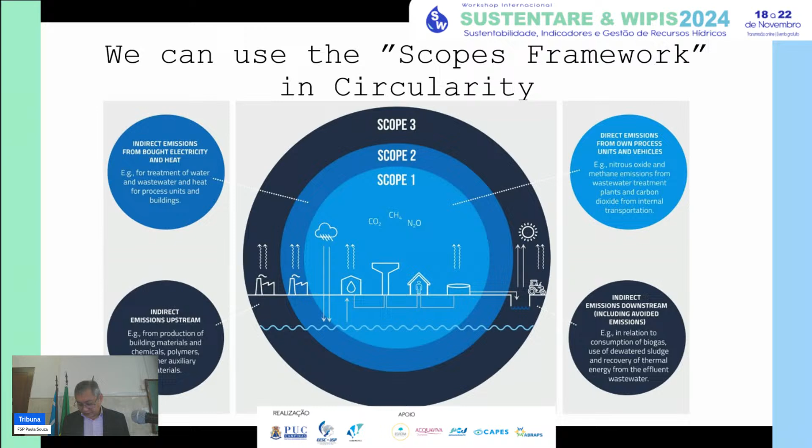So for today, I'm going to give examples of what I would call Scope 1 and Scope 2 circularity. This is a diagram I borrowed from a paper that came out a couple of years ago. It's really a climate change paper, an emissions paper, but I like the drawing, and I think it basically shows you what I'm talking about.

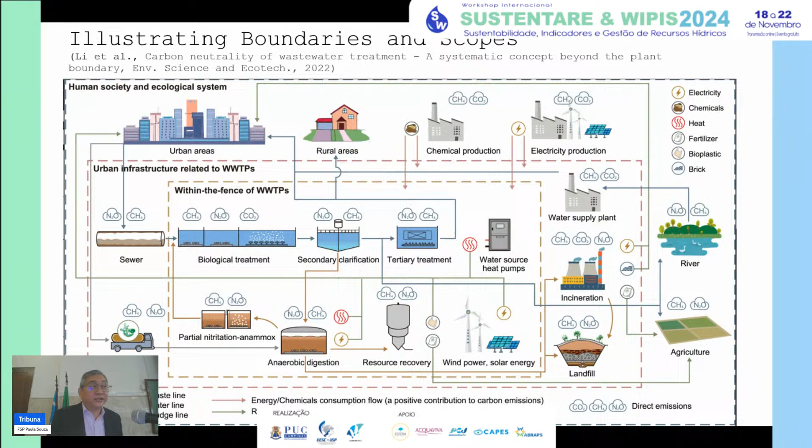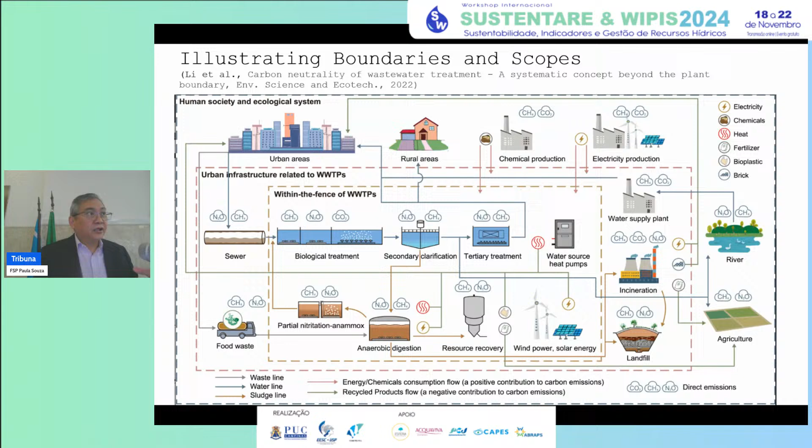Think of Scope 1 as that boundary condition within the plant, and this is in the context of wastewater treatment. So within the plant, I can have circularity already. Then Scope 2 might be the urban infrastructure that's related to the treatment plant. So for me, that's thinking about not just wastewater, but also water—how do we start doing water reuse, for example? And then obviously, Scope 3 is the larger human society and ecological system. You can think of circularity there at that larger system, but I want to focus on, again, within the plant and also the water and sanitation sector.

So what are we doing right now? This is the historical inertia, if you will, of our system in terms of centralized water infrastructure. Typically, we get our raw water supply from surface water or groundwater. Here I'm showing a reservoir that was created specifically to get raw water—it may be a lake, it may be a man-made reservoir. And then we get that water, we treat it in a drinking water treatment plant, and then we pipe that treated, very clean water, millions of gallons per day, or millions of liters per day—sorry, I've got to think metric.

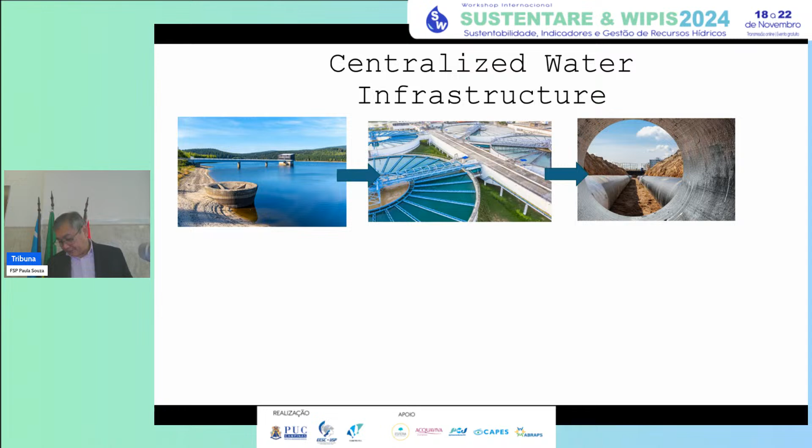Maybe thousands of kilometers. A typical system might have, for example, the city of Atlanta has 2,000 miles—so that's roughly 3,500 kilometers of pipes for drinking water, and about the same, 3,500 to 3,600 kilometers of pipes for wastewater. Other cities like Charlotte, which is the biggest city in North Carolina, it's double that—it's a more spread-out city, so it's actually more like 7,000 kilometers of pipe network. So we pump millions of liters per day through these thousands of kilometers of pipe. Lots of energy involved with that, right?

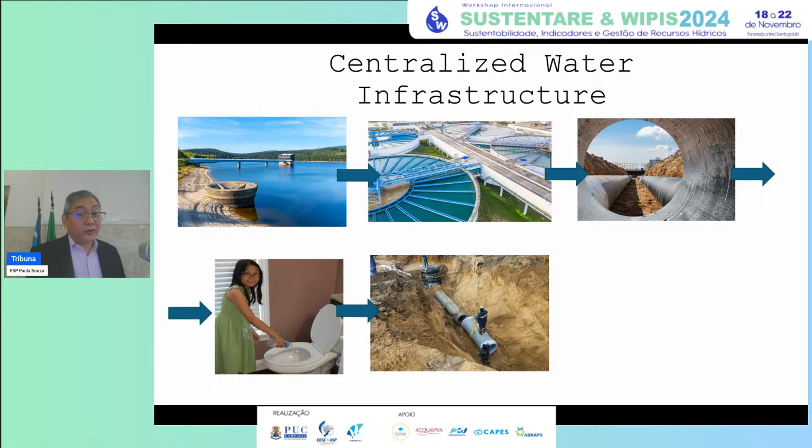And then we use that clean drinking water to flush our toilets—that's what we're doing right now. Then we collect all that wastewater, same deal, sewage lines that are thousands of kilometers of pipes. And then we treat that in a large wastewater treatment plant so that we can discharge that water into another river, another lake. And then the cycle goes on.

So there's some inherent circularity here in that I might be a utility or a town or a city—I put my treated wastewater into a river or lake, and that same river or lake might be the drinking water source for another town or municipality downstream. That's happening in my area, where there's a lake in North Carolina where the South Durham wastewater treatment plant puts its water into Jordan Lake, and Jordan Lake is the source of drinking water for two other major towns in that region. So there is already some indirect, if you will, reuse of water, and that's happening all over the world. It's just part of the water cycle now.

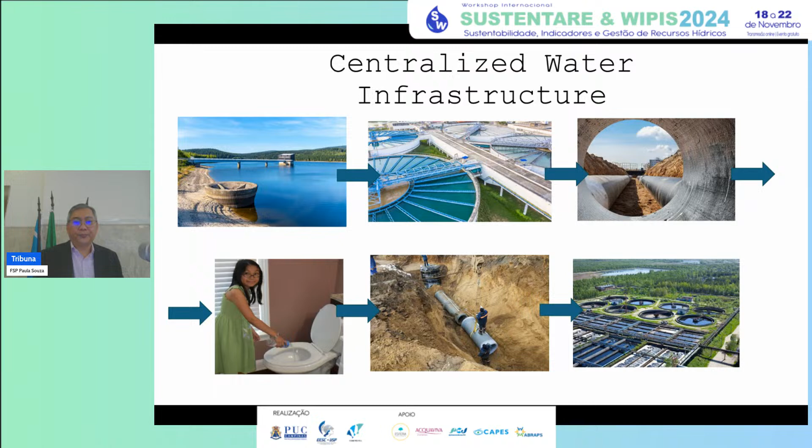So we need this to be more circular, because right now it's very linear, even though we do have what I'd call non-intended reuse of water. This is a diagram from a report from Arcadis that talks about how we can save energy, lower greenhouse gas emissions, and avoid hydrologic cycle disruptions. This is because we're usually trying to get water from one basin and return it to that same basin, but sometimes we return the water to a different basin, so there's inter-basin transfer, and then also capital and operation expenditures.

So this diagram is showing us how we can reuse wastewater, recycle it, and then use it, in this case, for water in the home.

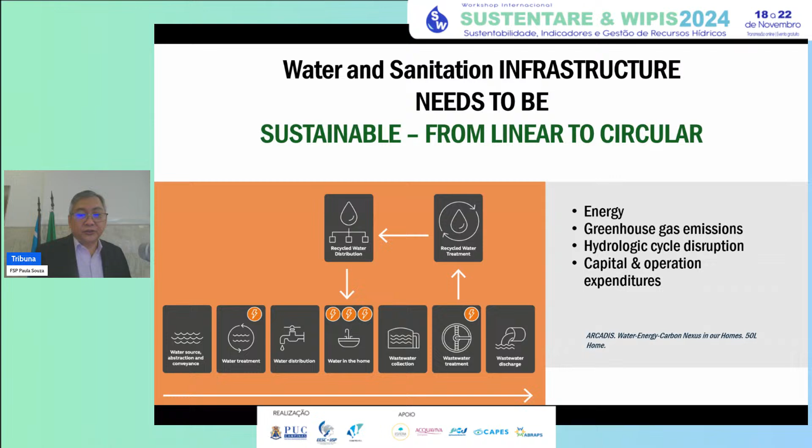What Professor Tadeo was talking about was, for example, in the city of Raleigh and the town of Cary, close to North Carolina State University, they actually treat the water to a quality where it can be used for irrigation, mostly irrigation—not yet for toilet flushing. So maybe 5% to 10% of the wastewater can be used for that, with additional chlorination, for example.

Then that water is put into a reservoir, a natural system, and that becomes the source of raw water for a city. It goes through the same traditional drinking water treatment plant system. So this is what traditionally is called indirect potable reuse.

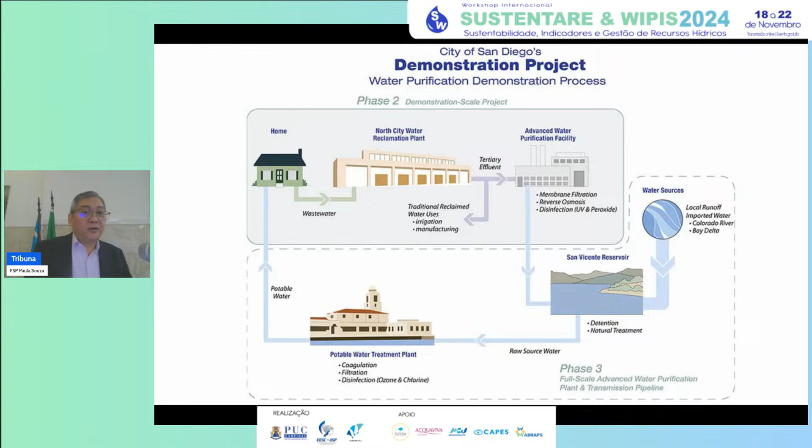Countries like Singapore have been doing this for a long time now—the NEWater Project is very similar. 50% of their water in Singapore is pretty much recycled wastewater. And now this is happening in places like California.

So just to show you what's happening now, California is taking the next step to have direct potable reuse. So what is direct potable reuse? I don't put the wastewater effluent into a reservoir—I put it straight into my drinking water treatment plant. So it really is directly doing that. This came out just a few months ago.

It's basically showing that following years of research and public engagement, which is very, very important—it's not so much the technical part, it's actually the education and engagement of the public. Because, you know, before we called it toilet to tap, and that's not a really good term, because if you call it that way, people think, oh, I'm drinking my toilet water. But it's not really true—you're drinking very highly treated water.

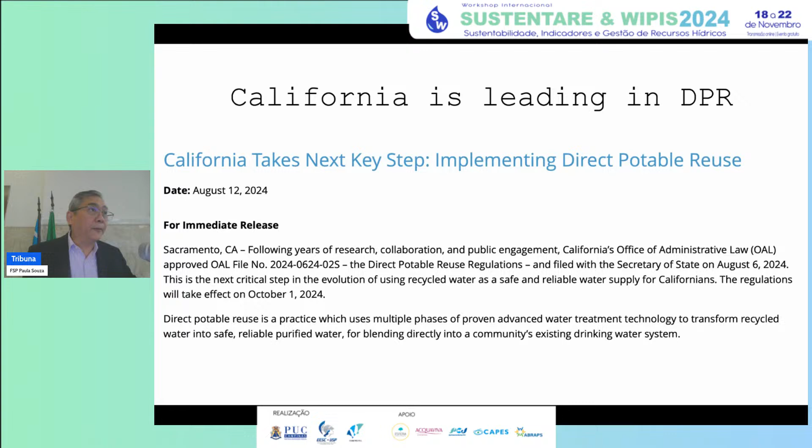And so basically, there are now regulations that have been approved in California. Starting just last month, October 1, 2024, these regulations are now in place in California. The reason is that California has an issue with a growing population but a lack of sources of water in many urban districts—for example, in Southern California, where San Diego is. Maybe not so much in Northern California, but when you have a big drought, Southern California is a big issue. This is true for other states too—Nevada, for example, Western states, and maybe even Southern states like Texas, parts of Texas.

Just to summarize, this is a diagram from the Water Reuse Foundation. What I'm talking about is wastewater treatment, and it says including source control—that's very important to make sure you don't have discharges from industry, for example, that would make your wastewater treatment process less effective.

And then you have advanced purification—these are some of the technologies involved. Maybe ozone for oxidation and disinfection, activated carbon for removal of organics. A big issue in the US right now is PFAS, perfluorinated substances—probably have heard about this. It's a byproduct of Teflon and water repellent chemicals that we put in our clothes, shoes, furniture, and firefighting foams. That has contaminated a lot of water sources, and it's very hard to degrade and remove from the environment.

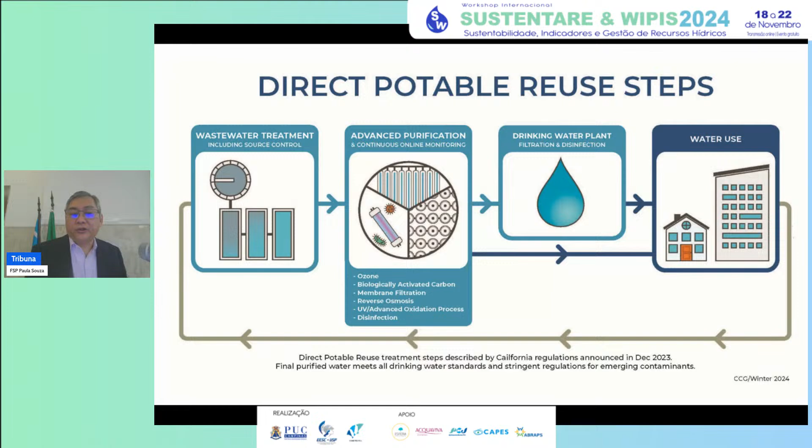Also, obviously, things like personal products, pharmaceutical products, hormones, those types of things—activated carbon is quite good at removing organic contaminants. And then I mentioned membrane filtration, RO, and then UV advanced oxidation processes and disinfection. Then that water goes straight to the drinking water plant, and then also for water use, and you close the cycle. So this is direct potable reuse.

It's a little bit small, but this is a map of California and all the potable reuse projects. You can find this map from WateReuse California. It's funny because the units are acre feet per year, which is very American, right? Surface area, 1 acre, 1 foot, and that's equivalent to about 3,377 liters per day.

If you think about all of the potable reuse projects, the colors are basically looking at groundwater. In other words, you treat the wastewater, put it back to the ground, and then that groundwater is the source. The aquifer is the source for drinking water, or surface water, and also future plants.

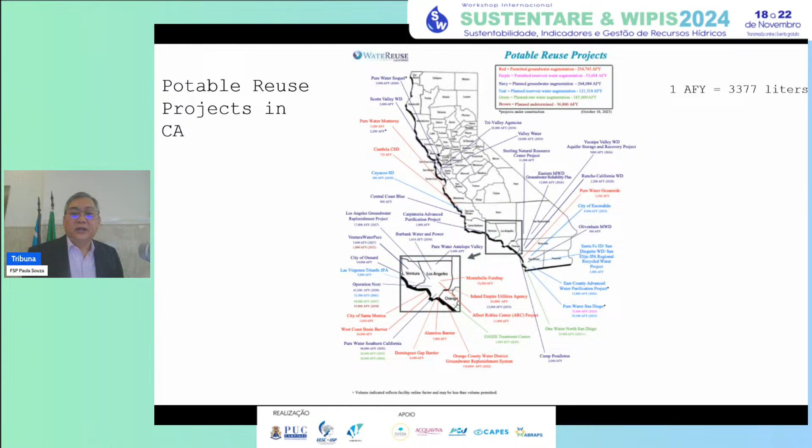Here is a more magnified image for just Los Angeles, which is Southern California. So we already have existing 93,000 acre feet per year, but the planned one is equivalent to about 1,377 MLD, million liters per day.

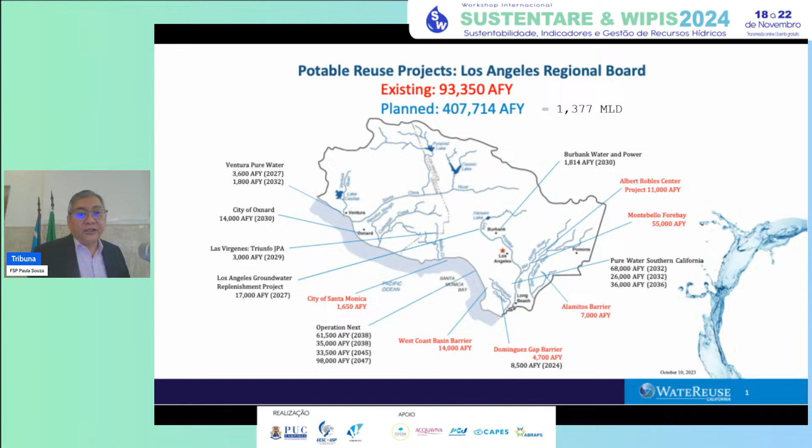So it's happening. And again, these are all the different plans. Existing is the red, and then the plans are there. Different cities are planning pretty much potable reuse projects in California.

Let me give you an example of within the fence, or inside the fence, circularity. Here is a process for biosolids treatment called thermal hydrolysis.

This is basically pressure cooking biosolids. So the biosolids you produce, for example, from your biological activated sludge system, you usually put that into an anaerobic digester. The anaerobic digester gives you biogas, methane, that you can reuse for energy. But this process happens before the digester. You actually put the biosolids through high pressure and high temperature, maybe 90 psi or 165 degrees centigrade, a few atmosphere, and that basically opens up the cells like pressure cooking.

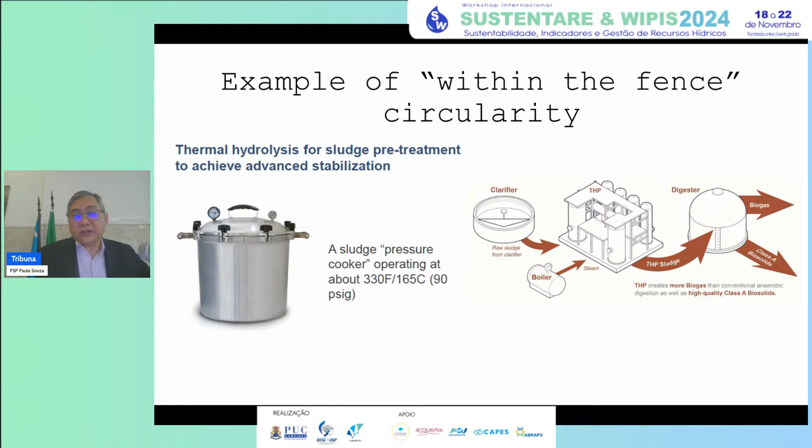What that does is it allows the following anaerobic digestion to be more efficient, more effective, and creates more methane. So these are the benefits: you can lower your anaerobic digester volume, which means lower capital cost. You can increase your biogas production, even if it's just a 20% increase, that's greater revenue. Your volatile solids reduction means you don't have hauling costs, so you lower your hauling costs. Your cake solids will be higher in solids content, lower moisture, so again you lower transportation costs, and you get a Class A product because your biosolids is sterilized, which is good for the environment.

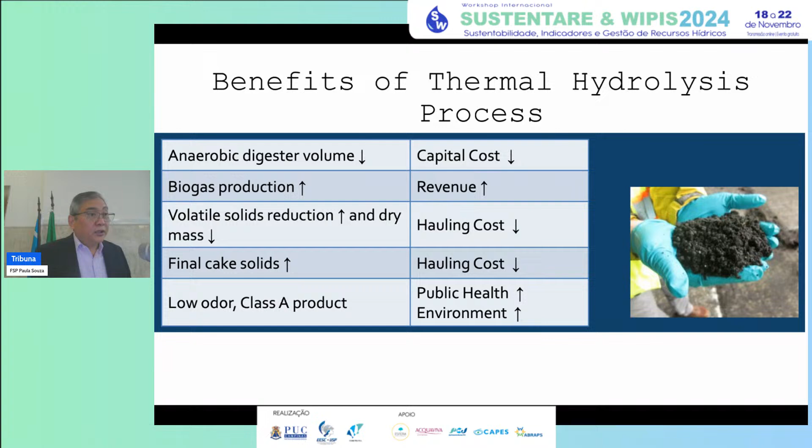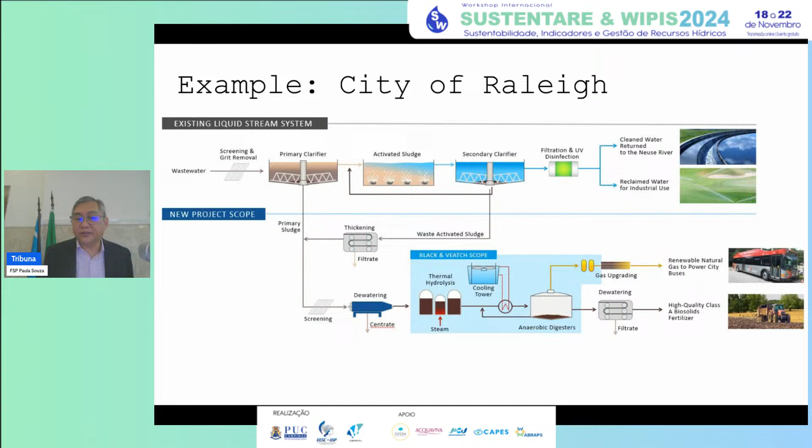Another example, if I think about widening this, is how do I do something like co-digestion of food waste? In the US, you have billions of pounds of food waste. The statistic is globally 38% of food from farm to fork goes uneaten. It becomes waste, whether waste at the farm, waste in the transport, or in the restaurants, or in the houses. Almost 40%—that's a lot of food waste.

There's also a lot of grease waste—this is the fats, oils, and the grease. In the US, we have grease interceptors, which basically prevent that; these are like settling tanks. After a restaurant, you have these settling tanks. They're on the ground, under the ground, and basically they allow the capture of the fats, the oils, and the grease to float on top, and that's recovered.

The reason for that is you don't want that to go to the sewer line, because then you get all these FOG deposits, and they block the sewer lines, and then you get all kinds of issues, right? I don't know if you've heard of the fatbergs in London and everywhere around the world. They're finding tons and tons of fats and oils and grease deposits in sewer lines.

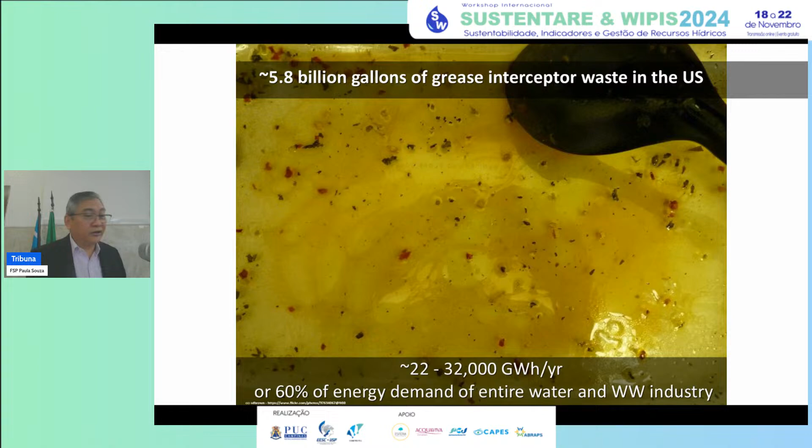Fats and oils have very high energy and calorie content, so you can collect some of that. Here I'm showing a sampling of a grease interceptor. It looks like this, and you can look at how much fats, oil, and grease are in these interceptors.

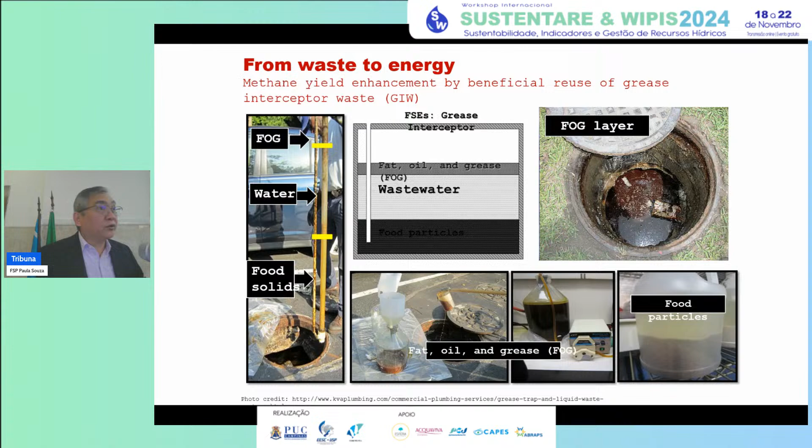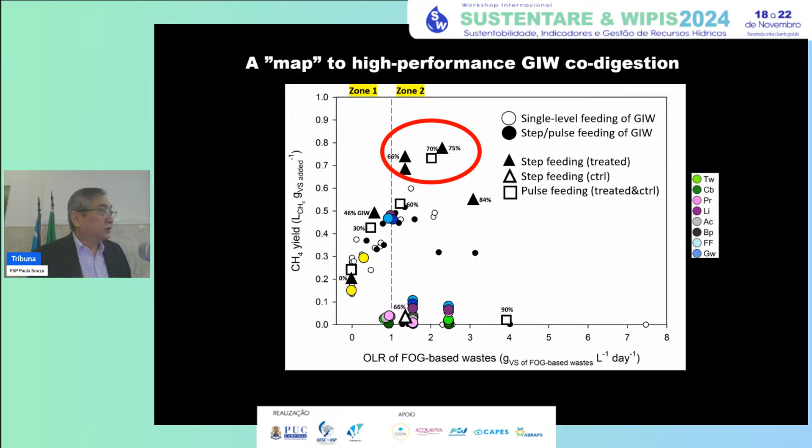You can reach those values if you train your digester. If you just feed this directly, your digester will die—it's too much load, too fast. But if you train it step by step and feed the right substrates, you can get to those high values. This is just summarizing a lot of research data.

We have a big issue still in the US in that it needs to be sustainable. Because of greenhouse gas emissions, energy, and capital expenditures, our infrastructure needs to be sustainable. Right now in the US, our infrastructure for water and sanitation is so behind. We need still billions of dollars—about $20+ billion over the next 10, 20 years—just to update the pipes. It's very expensive, typically $1 million to a few million dollars per mile of pipe that you replace, because you have to dig it out and replace it.

So one possible vision is reducing water use, and I'm putting here a big vision of 75% reduction in water use and 50% reduction in energy. I'll talk about that.

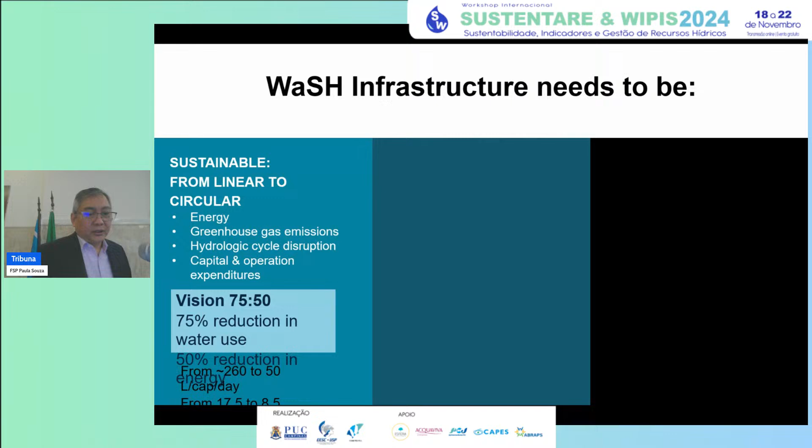The next issue is climate change. If you have extreme flooding happening, like what happened in Western North Carolina, you can have whole plants—drinking water and wastewater—destroyed underwater in just one day. The city of Asheville in Western North Carolina didn't have potable water for 50+ days, almost 60 days. They just got the first drinking water 2 days ago. Can you imagine 100,000 people, most of the city, not having drinking water? And that's because of climate change.

So that's an issue—resilience. And then finally, equity. In the US, you'd think everybody has water and sanitation, but actually no—we have 2.2 million Americans, and that's a low estimate, who don't have access to clean drinking water and safe sanitation. Maybe they have a toilet, but in some parts of the country, when flushed, the wastewater just goes to the backyard like a cesspool. This is a big issue, a question of equity. Most of these situations happen in low income communities and communities of color, so there's a racial and income issue here that we have to be aware of.

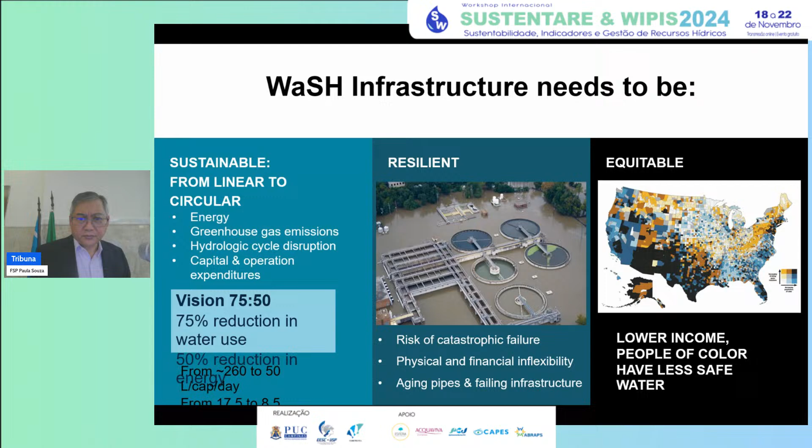Most centralized systems in the US reach people in urban areas—they're close enough to be connected. But in rural areas, people are not connected to the centralized sewer line because it's too far, too expensive. In some states, septic tanks are 50% of the wastewater treatment, on-site treatment systems. So what's needed, in my mind, is a more integrated water system.

These are some quotes from thinkers and papers saying we need to rethink this integration, make sure we are innovating, and we need radical innovation. So here is where I'm putting out this goal: at least in the US, 75% reduction in water use—that's a huge goal—and 50% reduction in energy. This is what we call a big, audacious goal. Where are these numbers coming from?

Let's think about reduction in water use. The average water use in the home breaks down like this: about 1/4 is for flushing toilets—remember, we're flushing it with clean drinking water. About another 1/5 is for washing clothes. And then you have the other half, maybe showers and sinks.

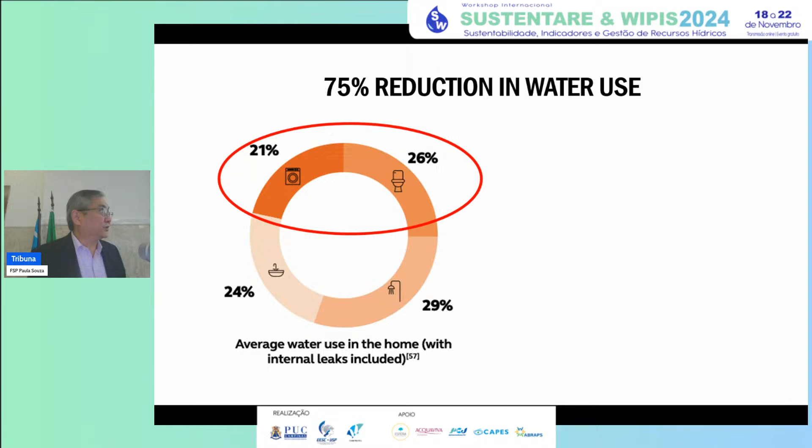This number right away is 47% right off the bat if you don't use clean drinking water for this. There is no point in using clean drinking water for flushing your toilet.

The other thing is that the average water system loss because of leaks in the sewers and leaks in the distribution pipes is about 16%. Some are higher, some are lower. The newer systems are lower, 5% or less, very good. But some systems may be as high as 20%, just water losses because of thousands of kilometers of pipes.

This paper put out by Arcadis was talking about how we can get it down from 260 liters per capita per day to 50 liters per capita per day in the US. We can do it if we take out that 50% right away, with more efficient appliances and smart appliances and taking care of the leaks.

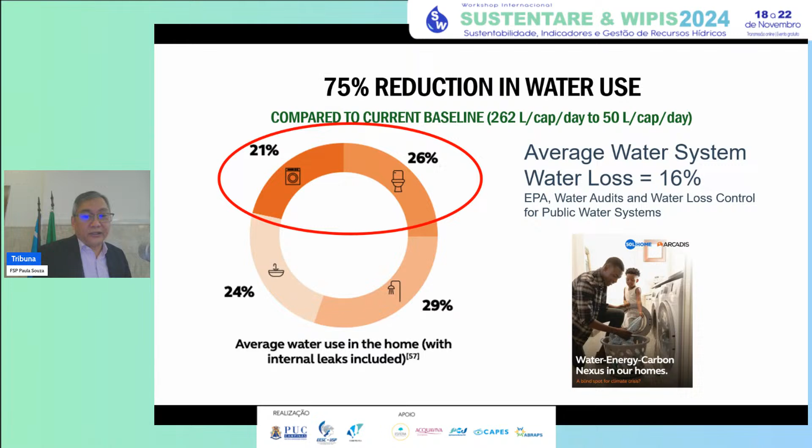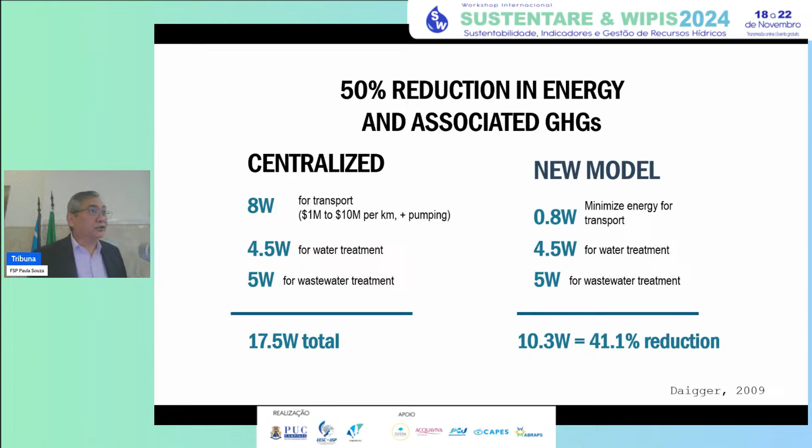What about the 50% reduction in energy? Here I just used the number that's been published. For a centralized system, this is per person: 8 watts for transport, 4.5 watts for water treatment, 5 watts for wastewater treatment. If I just reduce that transport from 8 to 0.8, right away I get a 41% reduction in energy, if I don't have to pump water long distances in large volumes every day. So that's just kind of a back of the envelope, rough calculation. But you can see how we can get to 75-50.

So what I'm talking about is transitioning to what I call an integrated socio-technical system. Right now we have centralized or grid-dominated systems in the US, and we've talked about how sometimes that's not sustainable, not resilient, and not equitable. For the most part it works well, and it works for a lot of people, but it also leaves some people behind. So what I'm proposing is we transition to a more sustainable, resilient, equitable, and circular system.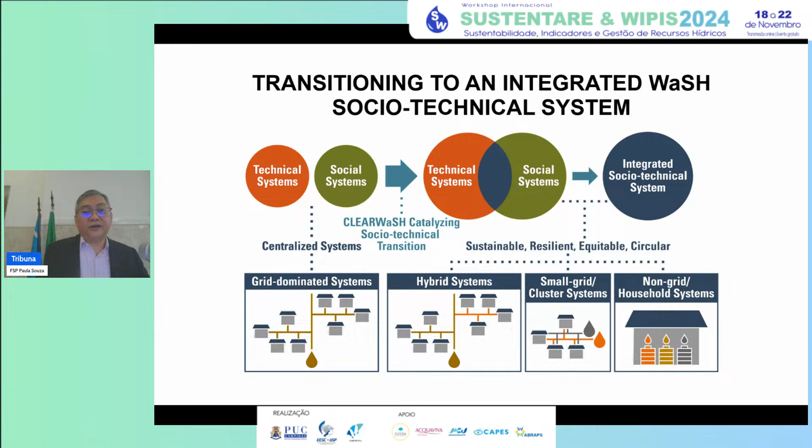The way to do that is to integrate the technical and the social system, and also to have other types of approaches like hybrid systems. Maybe some places are centralized in their water but decentralized in their wastewater. Maybe some cities are centralized and some are decentralized or distributed. Maybe we have small grid or cluster systems—neighborhoods, hundreds of houses instead of the whole city—and these dozens or hundreds of houses share their own wastewater system. Or maybe, in the most decentralized case, the house itself is where you find the technologies for reusing the water.

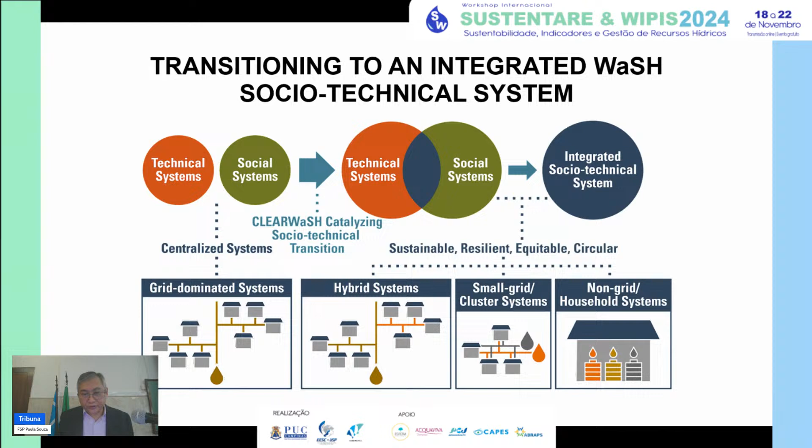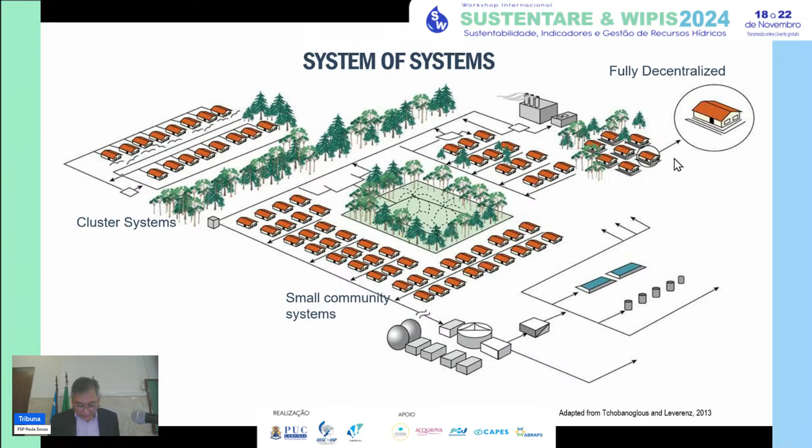So this is more about the future. A system of systems where you might have a small community system, you might have cluster systems, and then you might have a fully decentralized system just within the house. Let me show you what that looks like.

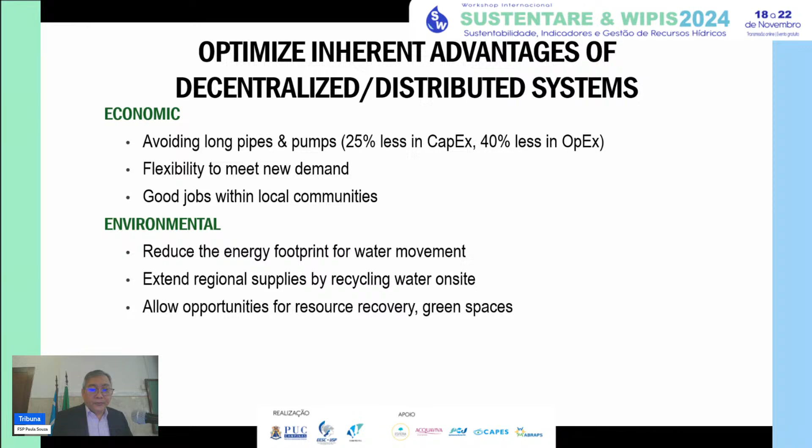First let me go through the advantages of decentralized systems or hybrid systems. Avoiding the long pipes and pumps, flexibility, because now I can design these systems according to need and use, and I can also put the jobs in the local communities. From the environmental side, I can reduce the energy footprint, extend regional supplies by recycling water on site so there's no inter-basin transfer, and allow opportunities for resource recovery and green spaces if I do this right.

From a social side, there's resiliency to community events. For example, in Western North Carolina, when the drinking water system was down, the whole city was without water. If you have a lot of smaller systems, you can bring those online one by one, and get some people water very early on. And when you have water in one spot, you can support other surrounding communities. For the first 10 days, they didn't have any water in the pipes, and people couldn't flush their toilets, so they had people doing water brigades, going house by house giving people water just so they could flush their toilets.

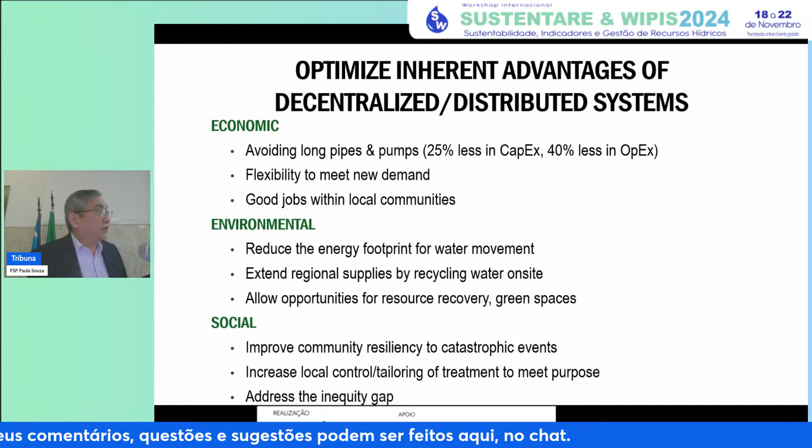So communities came together, but what if we don't rely on the centralized system and instead had smaller systems? It can be more flexible that way—increasing local control and tailoring the treatment to meet purpose. In other words, we're not treating water to the level needed for drinking water if we're just using it for irrigation or flushing toilets. And finally, to address the inequity gap, because for a lot of these places—rural areas, low-income communities—this is the way for them to get access to water and sanitation.

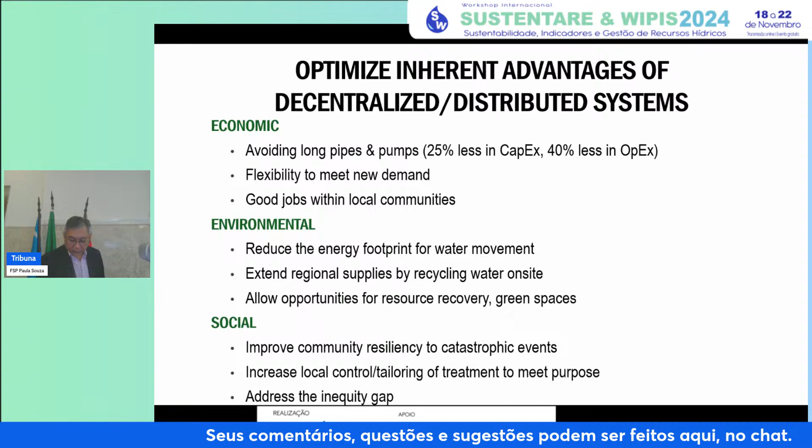So how is this going to work? There are lots of questions about this. This is just a kind of radical innovation, an idea. One of the questions is always, who's going to operate the small plants, who's going to operate the household systems? We are used to just flushing it and not caring what happens—flush it to forget it. The household is really not involved in water or wastewater. They take it for granted unless there's a problem, and then we have to call the plumber and do all kinds of things.

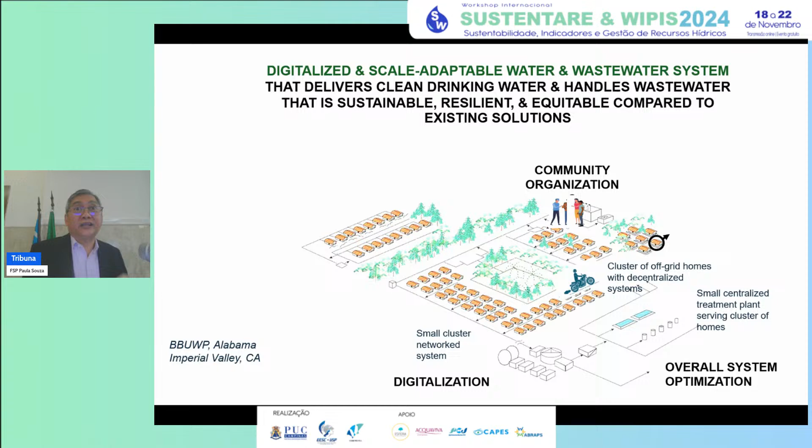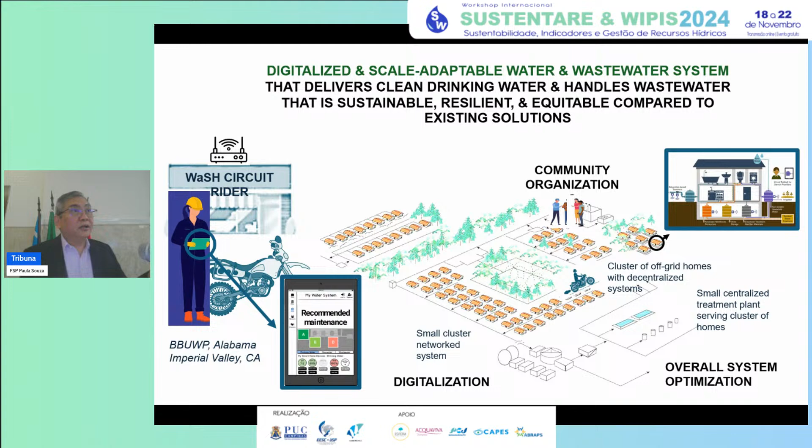To me, the solution is, in some ways, two things. One is technology—if we have sensors, we can digitalize the data. What's going to happen is that in terms of operation, only a few people are really needed. Maybe the utility can decentralize it so operators can just watch the screen and operate maybe 20 treatment systems around the city, relying on sensors and data coming in through Wi-Fi. They can see which plant needs work or maintenance and monitor it from afar. So you don't need an operator for each small system—one operator can operate a lot of different systems. This is called the circuit rider concept, where one operator goes around fixing what's wrong and maintaining the system.

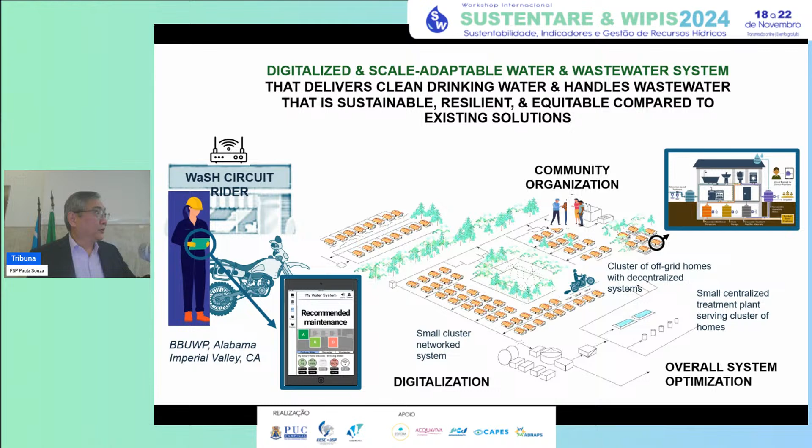The second is involving the community. This is why it's an integrated socio-technical system. People are going to be more aware of what's going on in their water, and they'll be conscious about what they put in their wastewater, because they know that gray water is going to be recycled. So the social part of it is very important.

Let me give you an idea of circularity within a single household—I'm calling this the house of the future of water. First we have to realize there are many different kinds of wastewater we produce. We have yellow water, which is urine; gray water, from sinks, showers and bathtubs; and brown water, from the toilet. Those need different kinds of treatment. With urine, for example, you can treat it so you can actually recycle the nutrients, maybe nitrogen and phosphorus.

And then with gray water, you can treat it so it can actually be used back in your house for flushing the toilet, or washing your clothes. This is where we have to be comfortable with the technology, where the gray water is treated to the extent that we will use it for washing clothes. And this is going to happen with sensors and novel technologies.

Imagine if my sensors are connected so that on my cell phone I can check my water quality and my water quantity. Right now I can do that if I have a camera at home to see who's going into my house, or a controlled thermostat—right now I can check the temperature at my house and change it, even adjust my thermostat in the US from Brazil. Why can I not check my water quality right now? This requires sensors, and this requires me being able to see that quality. So it's not yet here, but it's coming.

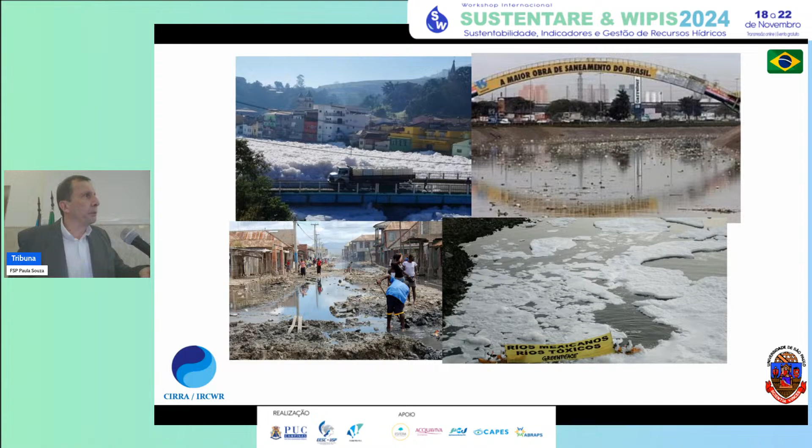So what are the options to cope with these problems? Professor Franz already told you a lot of the solutions, but one of the most important is using water more efficiently. We have a lot of homes or industries that use processes and fixtures that don't use water in an economical way. We have quite old fixtures in apartments or houses, and nowadays we can, of course, change this kind of equipment.

To reduce water consumption, I did a study here in São Paulo during the crisis of 2014-2016. The investment they made to put in place another water production system, to bring water from one place to São Paulo, if invested instead in replacing these fixtures, we would be able to reduce more water than was brought to São Paulo, maybe twice as much. So the investment was around 3 billion reals at the time.

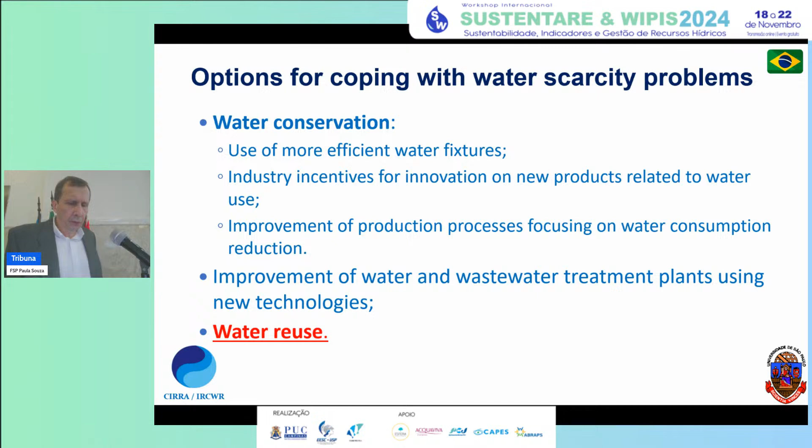So water reuse can be combined, of course, with the first option, which is reducing consumption. Water reuse can bring better solutions for many places.

So what you need to consider about water reuse, because water reuse schemes are quite complicated. When you talk about water reuse, people say, okay, let's make water reuse for non-potable use, which makes more sense, using water with a quality that is not enough for drinking but could be used for toilet flushing and things like that.

So what's the idea? How feasible would be the results of investing in non-potable water reuse schemes in established cities and settlements? What sector do we need to think about to invest in? We need to answer a lot of questions about the implementation of water reuse, such as who will use the water and what are the potential demands we need to address.

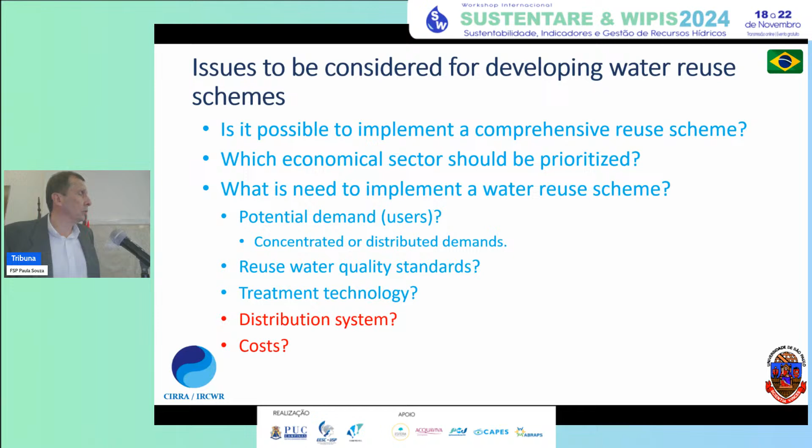If you go to a modern or new technology and double the treatment cost, instead of 20% we'll go to 25 or 30% of total investment. People think they won't adopt new technology because it's expensive, but how expensive is it compared to doing nothing - using the traditional business as usual approach? The cost is a quite important issue to take into account when implementing reuse systems.

Here in Brazil, we started to talk about projects related to non-potable reuse, but pretty much centralized water reuse schemes. The first one was implemented by Sabesp, a water supply company here in the São Paulo state.

In 1998, they implemented the first direct line for supplying reused water to a company called Coats Corrente, with a very low capacity of 70 liters per second, which is quite small. 10 years later, we had another project with a little higher capacity, for another company called Center, a paper industry for special papers production.

The most relevant project we implemented was in 2012, the Aquapolo project, designed to supply water for a petrochemical area because they were using potable water for the process.

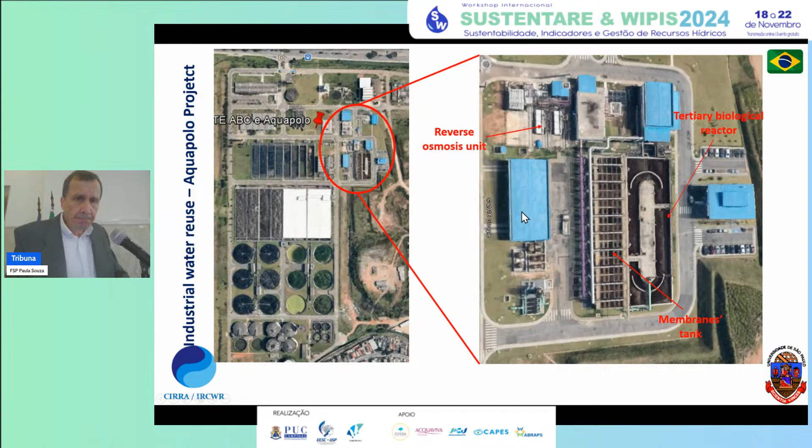Here are some pictures of the Aquapolo project. So the tertiary biological reactor and the MBR membranes, which are inside the reactor. Here it's not possible to see the membranes because you already have the sewage. A picture of the water coming from the tertiary MBR and the reverse osmosis system. The total capacity of the MBR system is 1,000 liters per second, and the reverse osmosis unit has a capacity of 200 liters per second of treatment, because not all the treated sewage will pass through the reverse osmosis system.

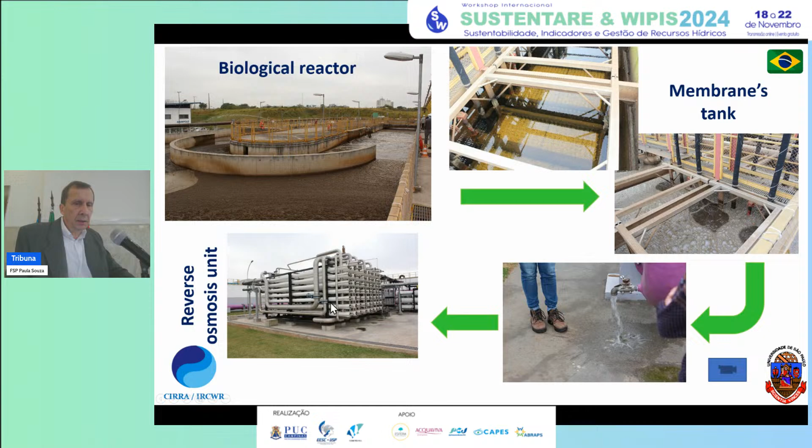So what are the limiting factors for non-potable use? We have distributed demand, mainly here in Brazil. We did a study here in the São Paulo metropolitan region to evaluate the potential for industrial water reuse. We evaluated all 5 largest wastewater treatment plants that we have, evaluating a radius of 10 kilometers from the sewage treatment plant to identify potential industrial users for the reused water. What were the results? Less than 3 cubic meters per second would be reused. Here in São Paulo metropolitan region, we have a production of about 50 or 60 cubic meters per second of sewage, and the potential for industrial use would be less than 3 cubic meters per second, or a little bit less, within 10 kilometers of the sewage plant.

What was quite interesting is that the largest wastewater treatment plant had the least potential for water reuse, because of the location and planning - we should plan to locate the sewage treatment plant close to the consumers. Of course it's more rational than implementing the sewage treatment plant and then developing the region around it. Then there's the distributed demand issue, high cost for implementation of the distribution system, some quality issues of the treated effluent because of the technology chosen to treat the wastewater - secondary treatment - and of course the lack of reused water standards. Always when you talk about water reuse, what are the standards, what is the quality needed for reused water? People want the same quality as potable water or natural water, but it should be planned to see if they actually need that quality of water.

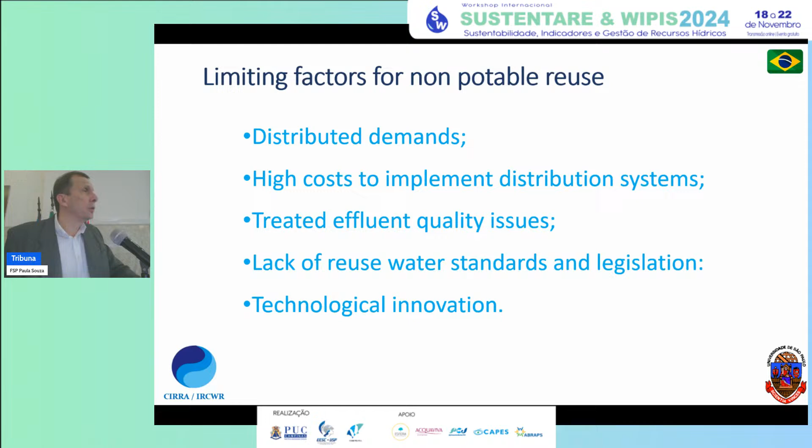And one question is technological innovation, which is debated because some people, some engineers in Brazil or in some areas think that technological innovation is not important, that you need to go to basic solutions. But of course it's not possible to address complex problems with traditional technologies. You should go to new technologies in order to have good results implementing these options for water reuse or things like that.

So what are the trends for the future here in Brazil? What we are thinking about is potable use, because we don't have a place anymore to bring water to the metropolitan region. The scenario of scarcity shows that it will not be possible to keep the same procedure related to the management of the reservoirs that we have. So potable use could be an option.

At the same time that we had the water crisis in Brazil from 2014 to 2016, people in other parts of the world were also facing problems with water scarcity. Here's news from the United States, where Texas started to run a direct potable use system. And at the same time we had water scarcity problems in São Paulo metropolitan region, Australia had a similar problem two years before. They implemented a lot of options: water desalination, water reuse, even for potable application.

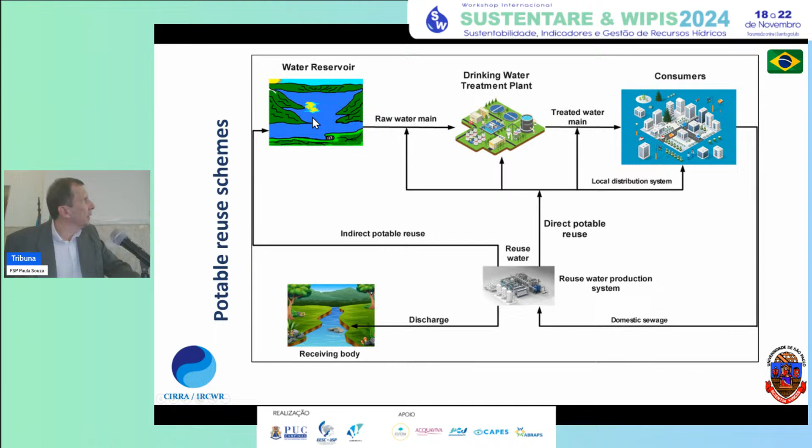For this, we have the concept of multiple barriers for implementation. This arrangement was defined by the experience from countries that had implemented direct potable reuse. We have a lot of contaminants, and it's quite difficult to address each one individually, so you group them into dissolved organics, dissolved inorganics, suspended solids, and microorganisms. Then you have barriers to remove these contaminants.

So the system that was consolidated for direct potable reuse is this: you can use secondary wastewater treatment complemented by membrane filtration. If you combine both, you have MBR systems. Then you have reverse osmosis, advanced oxidation or photochemical oxidation process, and chlorination. This is a train that has been validated by the WHO for producing potable water using domestic sewage.

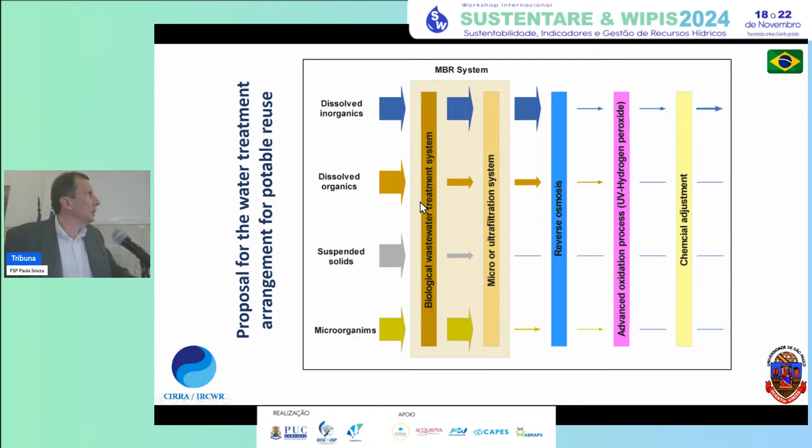In that sense, we are developing, here at USP in our department, a new project called the Altabas project—an alternative for drinking water production. It's supported by FINEP, a Brazilian agency that funds research in Brazil. That's the title of the project, and its length and aim.

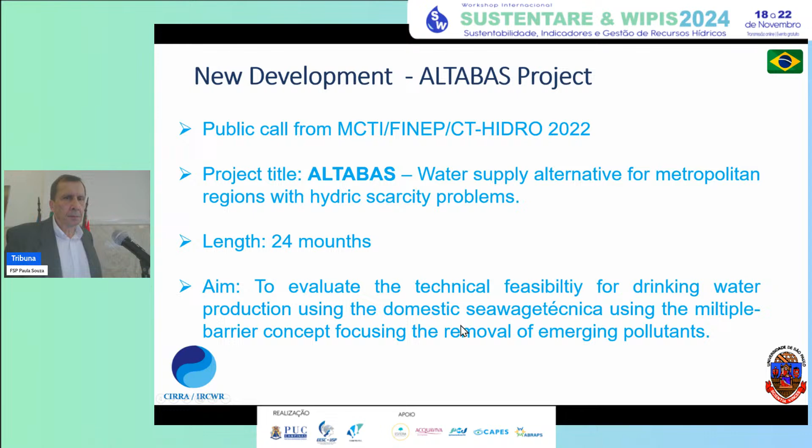So we are developing a pilot plant to demonstrate the feasibility of producing drinking water from sewage. This is the first pilot plant we tested in Campinas, at Sanasa, supported by the PCJ. We studied this because in Campinas, Sanasa implemented an MBR system for treating sewage, and we thought: since we already have this MBR system, let's see if it's possible to produce drinking water with different technologies.

So we implemented a system combining five different technologies in this pilot plant: reverse osmosis, which is behind this panel; UV oxidation process; activated carbon adsorption; and also a biological activated carbon system using ozone as a pre-oxidant. We tested combinations using reverse osmosis with oxidation, reverse osmosis with activated carbon, reverse osmosis with biological treatment, and everything together. We found that the best combination was reverse osmosis, UV oxidation process, and activated carbon for producing safe drinking water.

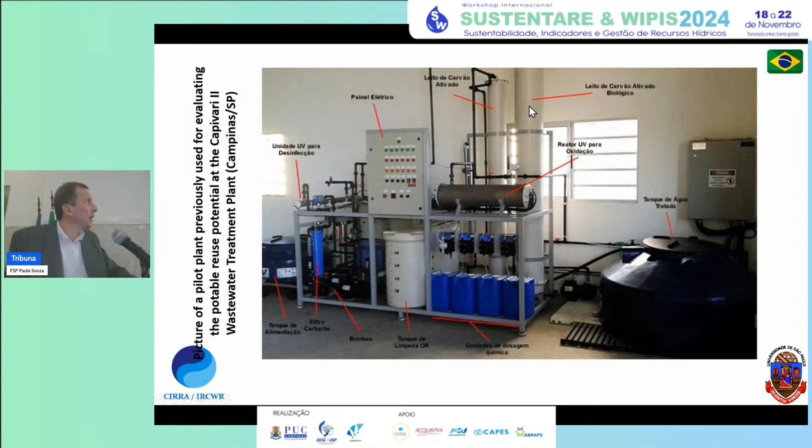So now we are developing a new pilot plant. In that case, we'll also include an MBR system. At Sanasa, they already had the MBR. In this project, it's a partnership between USP and Sabesp. We will implement an MBR pilot plant.

We're using the membranes that we develop in our lab. After the MBR, we will pass the permeate from the MBR to a reverse osmosis system, from the reverse osmosis system to the UV oxidation process, and finally to an adsorption carbon process.

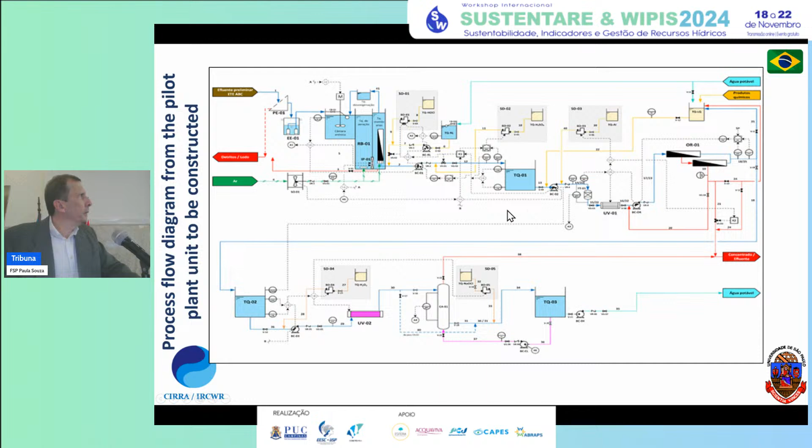The project is underway, so we are just constructing the pilot plant. It will be finished by the beginning of next year, and we're hoping maybe April or May to start the operation of this pilot plant.

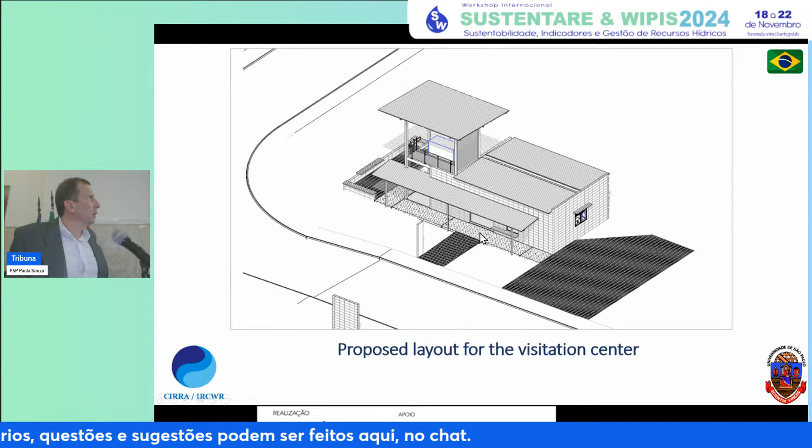And then we are also proposing a visiting center. It will be a demonstration unit. So we will have a specific building to install the project and make arrangements for visits from schools, from undergrad schools, or even from secondary schools or other interested people.

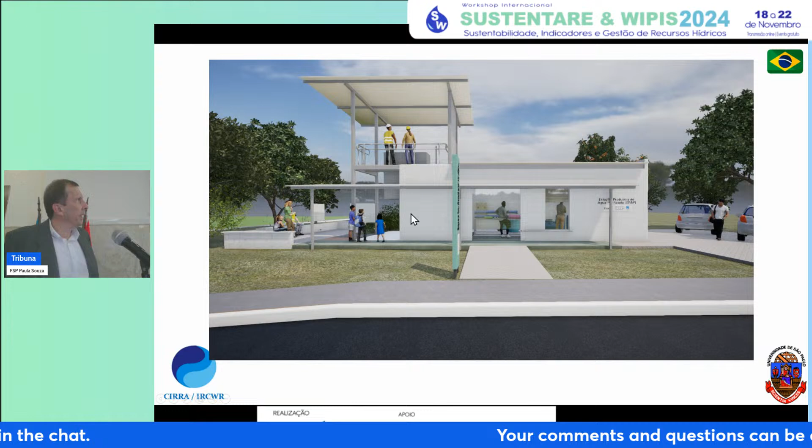Here's how the building will be, the design. So the MBR system will be placed in this area, and other components will be installed in this area. Just to show how the visiting center will be.

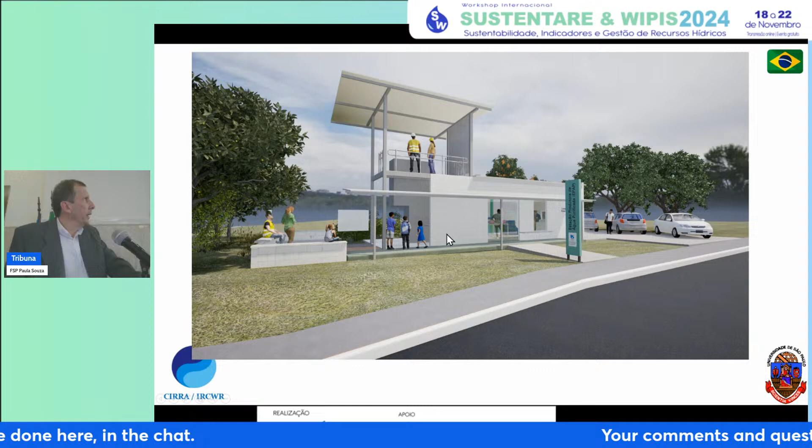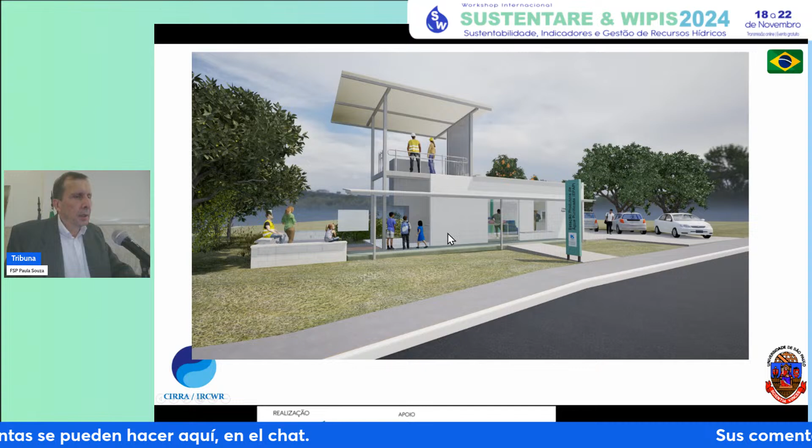We are also making a partnership with the people from the Faculdade de Saúde Pública. Professor Maria Teresa is involved, who will work with the microbiological issues related to water reuse.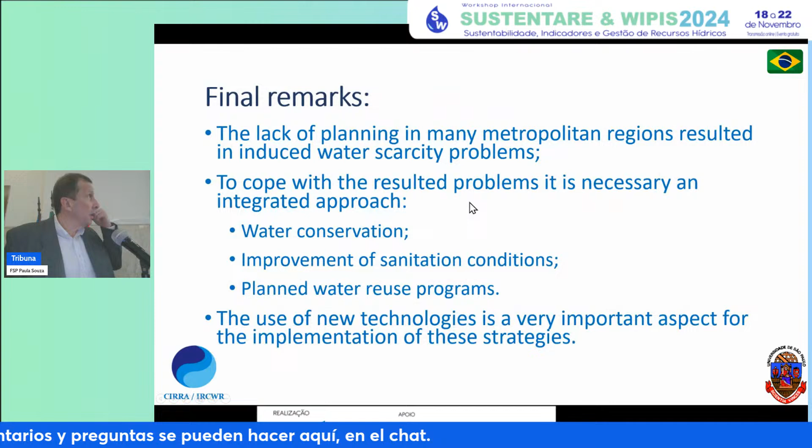It's only the images, and the final remarks for my presentation: what's the problem? The lack of planning in many metropolitan regions has induced water scarcity problems. Of course, the problems with water scarcity here in São Paulo are quite different from the northeast region of Brazil, or even in Manaus, where they have problems with water scarcity. They have the Amazon River, but they don't use the Amazon River as a source for drinking water. They use groundwater. But we have some problems with planning, which cause a lot of issues related to water scarcity.

To cope with these problems, we need an integrated approach, not only water reuse or water conservation. You need to combine all the tools that we have. Water conservation is the main one.

I think the most efficient way to use the resource is making a conservation program, like it was shown by the United States, to reduce water consumption by 75%, which is quite high. But it's possible to reduce, maybe not in Brazil, it's quite different, because in Brazil you have an average water consumption per person in the metropolitan region around 108 liters per person per day. In the United States, I think it's much closer to 300. So if you reach 50% or maybe 40% of reduction, it's significant.